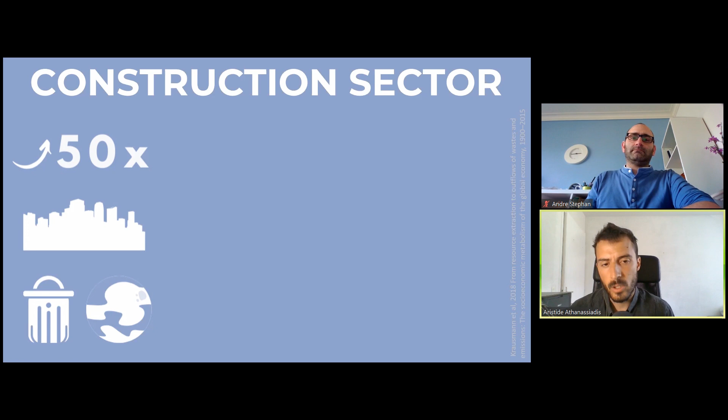So let's start with why do we focus on the construction sector and why it's so important to apply a circular economy on it. First of all, the construction sector is a huge driver of resource use and environmental impacts. One important fact is that the extraction rates of construction materials over the last century exploded to 50-fold. And this was mainly due to urbanization, building infrastructure, building cities.

And while this number might seem out of context, well, you have to think that because we're building cities, we are now extracting more and more materials that are harming the environmental ecosystems, but also produce a huge amount of waste. In cities, this is almost a third of materials that come in and that go out as waste. Now, why circular economy? It's because we could reuse cities as mines, and instead of extracting virgin raw materials, we could use those cities as secondary mines to satisfy our future needs of construction materials.

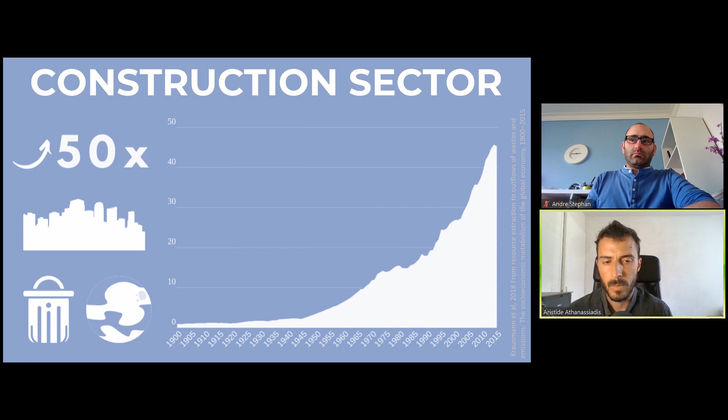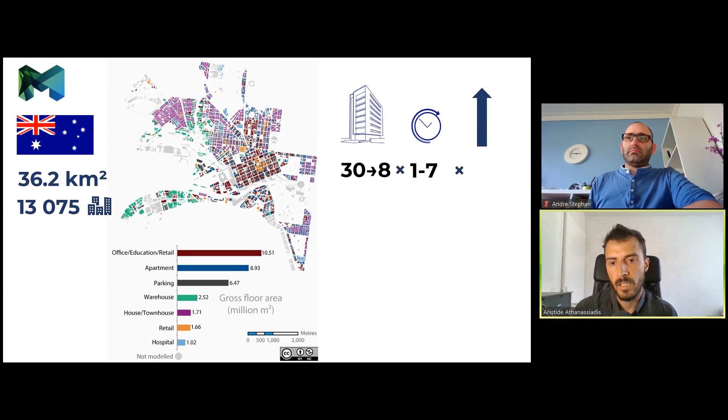So we took the CLUE database, the census land use and employment database, and in order to create some building typologies, we looked at different land uses. So there were 30 and we summarized it to 8. We also looked at different construction periods, up to 7 different construction periods, and lastly, different heights. So we looked at up to 3 different heights for these building typologies that you see here in the middle. So all in all, this combination created 48 archetypes, which are what we call a building typology that is quite unique.

And for each of these archetypes, we said, well, the material composition, but also this is what the windows look like, this is what the roofing looks like, and these are the materials that are included in the roofing. So what was very unique in our assessment and in our model is that each singular building, not only we knew where it was located on the map thanks to the GIS, but it was also modeled parametrically. So on the fly, we modeled each and every single one of these buildings, and we knew exactly how many doors, how many windows, how many walls we had, and what were the windows within those walls, and what were the materials within those windows, etc. So it's a very granular model that we were able to produce.

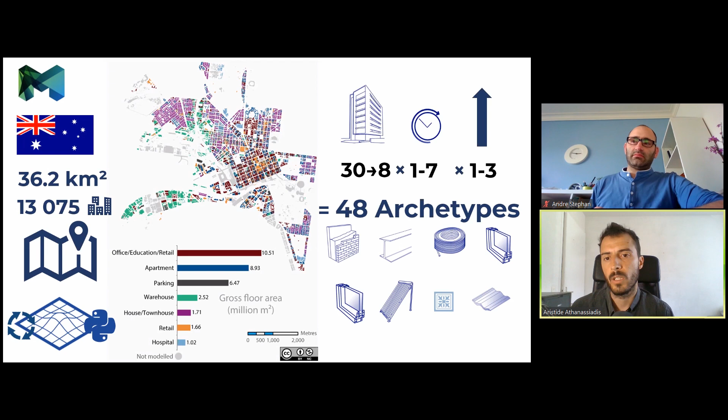The results of this modeling and this assessment are these types of maps. Let's start with the beginning. It's a material stock map, the one that you see at the bottom right. So this is a quantity map of Melbourne, how much the city of Melbourne weighs. And the additional contribution that we had is to include the environmental embodied requirements of this material stock. So how much energy, how much greenhouse gas emissions, how much water is used or produced in order to put this material stock into Melbourne.

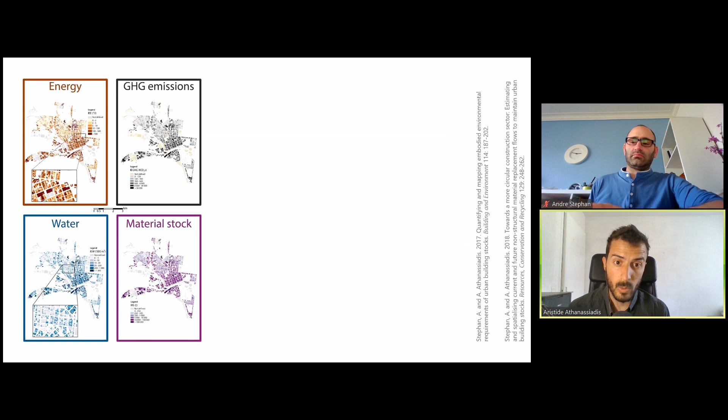So if we had to rebuild the whole city, how much energy, how much greenhouse gas emissions, how much water, how much materials would we use? So this is great. And now we try to summarize this into this small infographic.

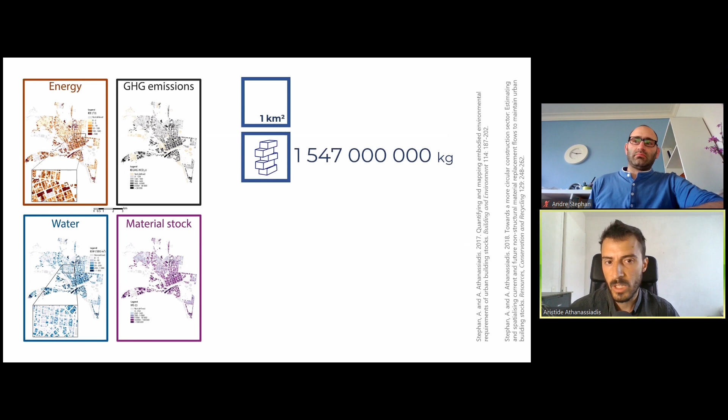So for 1 square kilometer, for the city of Melbourne to be rebuilt, you would need approximately 1.5 billion kilograms, 10 million gigajoules. In terms of water, that would be approximately 18 million cubic meters of water, and finally 605 million kilograms of CO2 equivalent. So all of this is for 1 square kilometer. And remember, the city of Melbourne is 36.2.

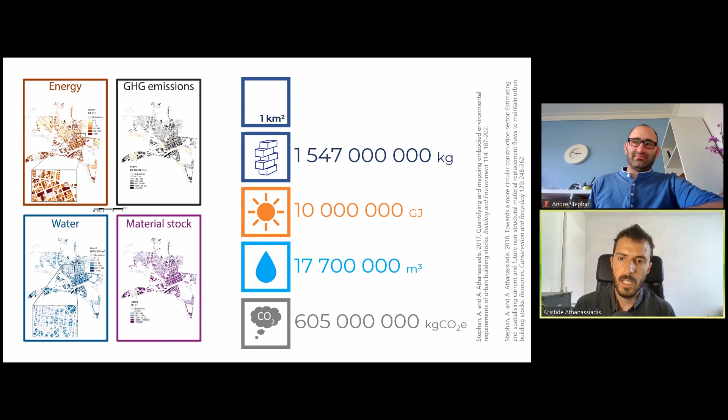So when we go to resilient resource use cities, you always need to remember that there is no such thing as a zero carbon or zero material city. There is a huge impact of our cities. So this was done as an overview of the entire city, but you can zoom in per material, per concrete, per steel, per plasterboard, per carpet, and see how much there was. Because of our fine-grained modeling, we could have these types of maps. And we could even go like how many windows you have in the entire city, how many doors you have. We are very flexible with what we can show.

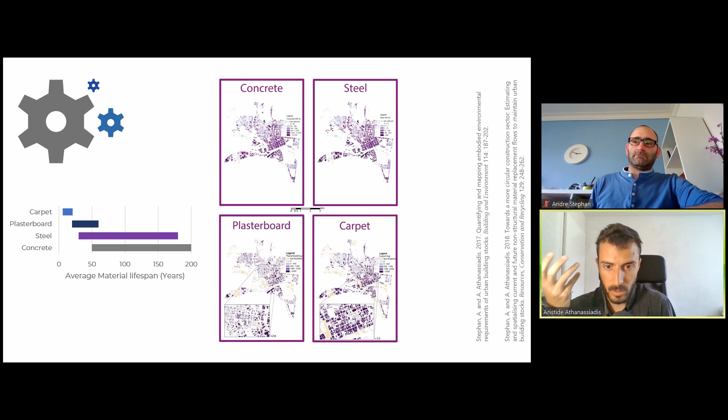In summary, you can see that this type of modeling is very interesting because we can also add a temporal element to it. And because all of these materials do not have the same lifespan, so for instance, concrete lasts much longer than plasterboard or carpet, you can also start thinking about, okay, when will certain materials appear as future waste or future resources? And because we can map these insights, we kind of know how the city performs as a metabolism and how much it churns in and out materials. This is the core of what this study developed. So you can see an overview of all of these maps. And now André is going to present to you what happens if we explore a bit more the temporal side of these maps.

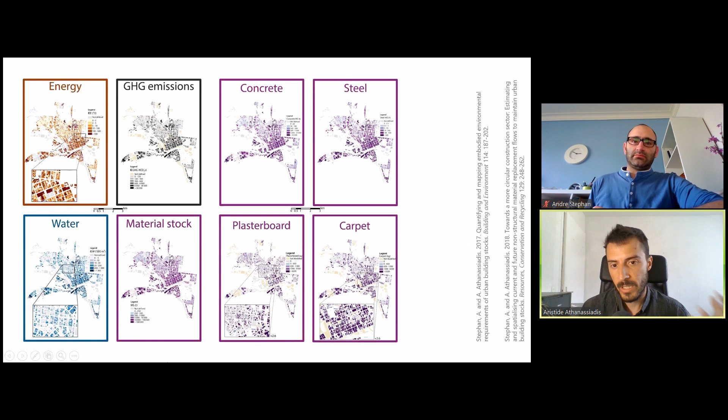All right, thanks Aristide for that presentation. And I'll take it from here. So what I wanted to talk about quickly is this particular data visualization that we tried to put together. So once we finished the study, we were a bit stuck with the amount of data and information that we had on our hands. And we had to be a little bit creative with how to actually get the message across. So what we did here is that we borrowed this visualization from population studies. That's an age pyramid. You're typically used to seeing this broken down into male and female, and the ages on the vertical axis. In here, it's the same. It's an age pyramid of materials.

So on the left side, you have concrete, which alone weighs 20 times more than all other materials combined. And on the right side, you have all the other materials stacked together. On the vertical axis is the age of that particular material in the city. Now, what does it show us? It shows us obviously distribution, how old is each material, where is it? It shows us that particular materials such as carpet and plasterboard, like Aristide was mentioning before, enter and exit the stock at much faster metabolic rates than other materials.

And what we also see is particular spikes in the pyramid. And this is really interesting because these spikes, when we dug into the data, were actually due to major construction activities, for example, hospitals or stadiums or significant buildings. And these present particular opportunities for circular economy and urban mining because they are concentrated in one site. So the logistics of collecting materials is much simpler than having to deal with multiple owners and trying to collect a little bit from different places.

Now, what I'd like you to look at here and how to perceive this age pyramid is actually to look at it as a table of contents of your inventory of materials, of your material stock. So you can actually, for example, click on this little bit of plasterboard here that is going to exit the stock in 9 years. And we can actually display a map of where this plasterboard is actually situated in the city and how much there is in each building and when it's going to exit.

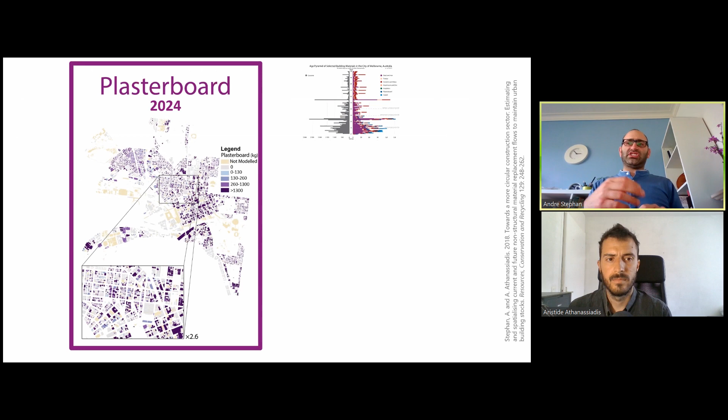Now, we want to just put it up front that there is a lot of uncertainty in such modeling. And there might be other ways of representing this, such as rolling averages over different years and so on. But this is more about the conceptual framework and what kind of information can actually be extracted. So this is really our table of contents.

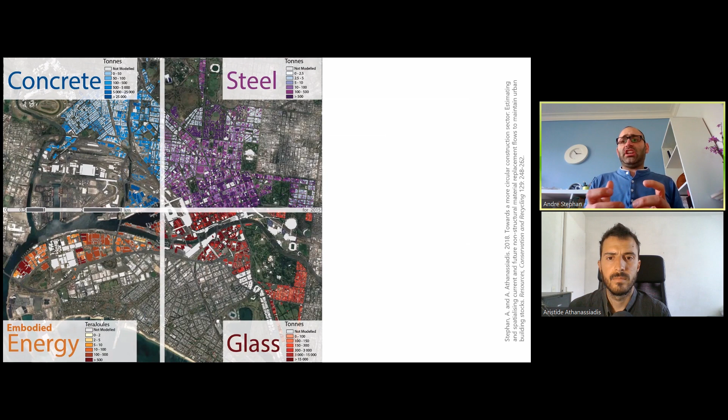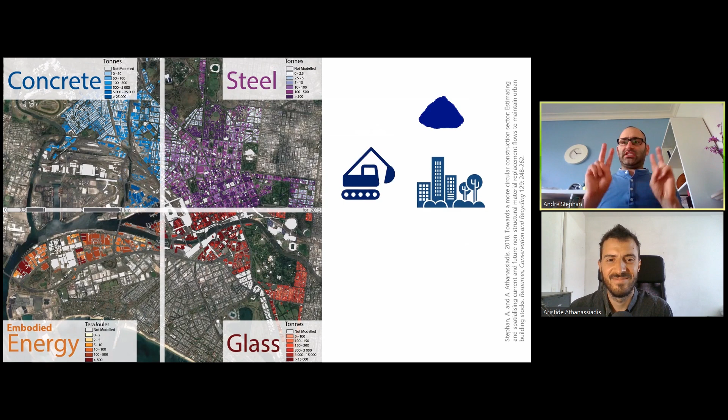So if I want to summarize quickly what we were doing here, we can actually produce maps of different quantities of materials and environmental flows across the city. And that really is the core of the contribution and typically how this can help inform urban mining in the future and how we can transition, like Aristide mentioned, from extracting raw materials from the far-flung edges of the world in Chile and Australia, depending where you live, of course, and actually moving this mining activity to cities themselves and trying to collect all of these materials to facilitate a circular economy.

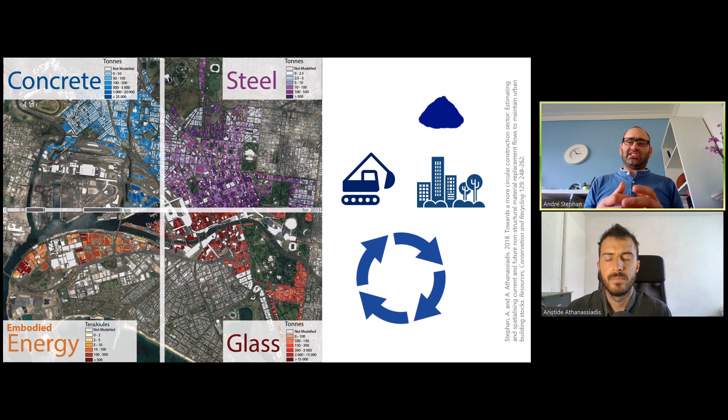Now, this all sounds really good, and let's do it now, but unfortunately, we're not really ready yet. So this research is just one of the many things that needs to be done, and a lot more needs to be done, so we can actually facilitate decision-making and make sure that there is actual market value and demand and other things that are needed to go and start mining cities.

So the first thing that really needs to be done in the future is improve the visualization of data, because it's so data intensive and it's very hard to digest at first glance. So we need to push this and kind of create single dashboards that summarize all of this as online tools, but not static dashboards, dynamic dashboards that also allow testing particular scenarios and investigating material outcomes and circular economy strategies.

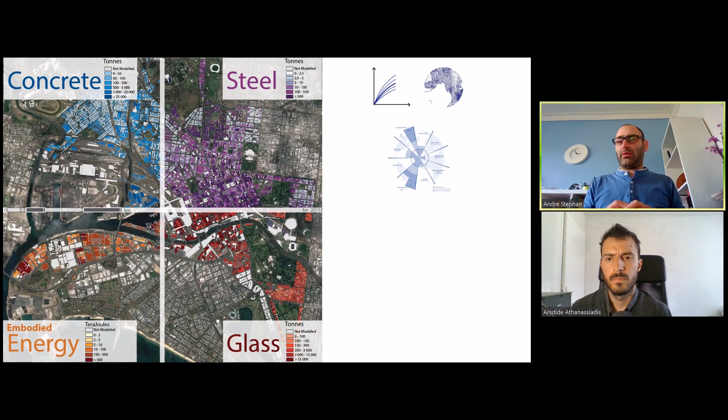We can also see how this model can easily be extended. So we talked about materials and embodied environmental flows and requirements, but we can add other environmental indicators such as the planetary boundaries framework or material criticality and map this on the city. We can also see how we could implement financial indicators such as the value of actually extracting or collecting these materials. And quick warning, this is dummy data, right? We didn't do this study.

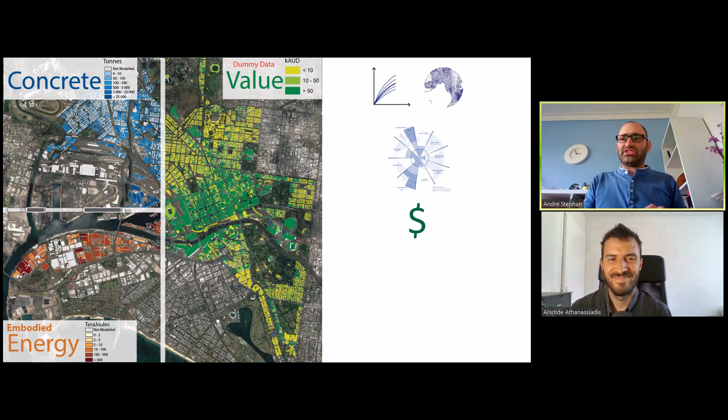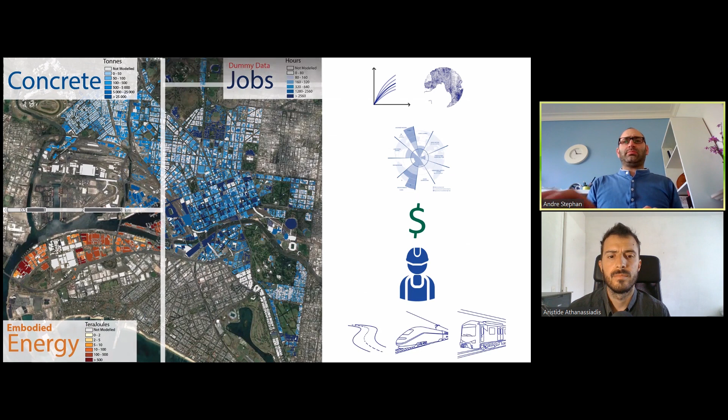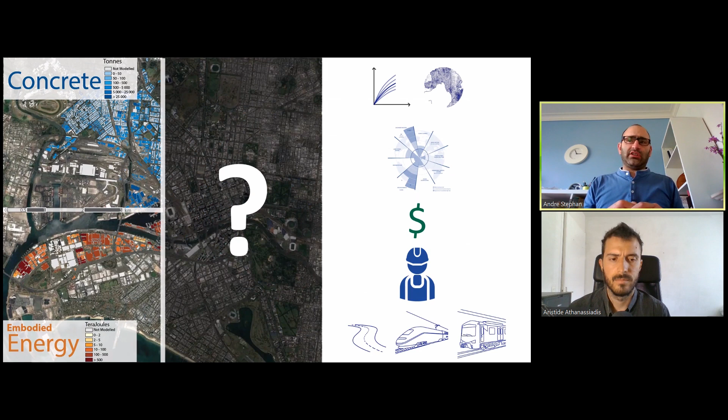We can also see how these particular circular economy strategies could produce jobs. Again, this is dummy data, but we're just trying to showcase what could be possible and how much this could empower decision-making. Lastly, we want to emphasize that we didn't model infrastructure, and we think that there is a lot of potential in actually mining infrastructure, notably because it tends to be quite systematic and it tends to be publicly owned, which kind of facilitates the whole process quite a lot. And there's lots of research to be done in this sense.